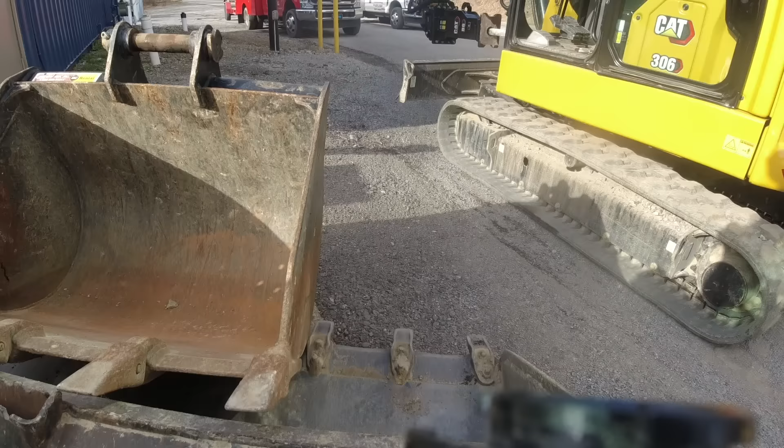Okay, one last clip, all covered up. I have 2 layers of plastic all weighted down. I don't want wind blowing underneath there. I just used all the debris that I had laying here, weighted that down, as well as this.

Day 2.5, actually day 3 - first day got moved in, broke up a little bit. Yesterday we got a lot done. I wanted to get here before everybody. I'm just going over all my paperwork. There's little details on here. I just want to make sure I don't miss anything.

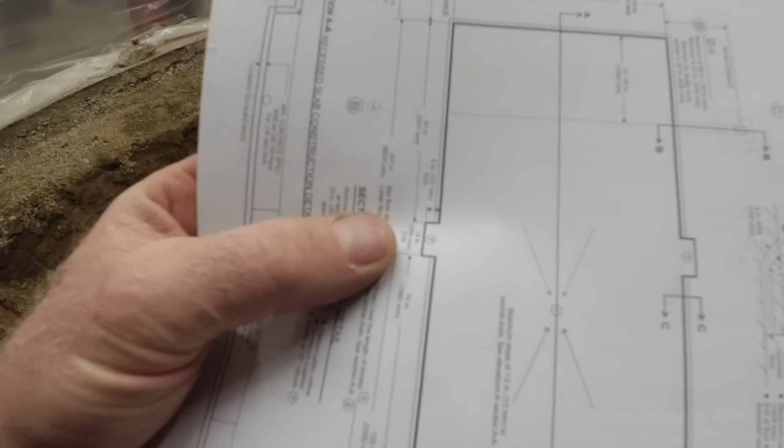Like these 4 pockets that go around the perimeter for the unit to sit in, as well as this conduit for the control panel. So just getting all the positioning set up.

We have our floor drain that's fixed. We know where that is, as well as our height elevation. This says 12.25 inches down from the surface, 12.25 to 12.75 down.

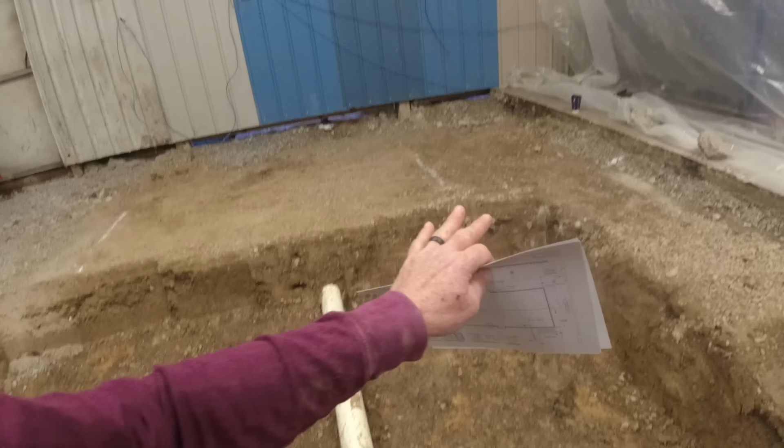Talk to them - they want 13 inches. They'd rather have a little wiggle room to shim it up than be too high and have to deal with it then. So no problem, we'll make this 13 inches down from the surface all the way around.

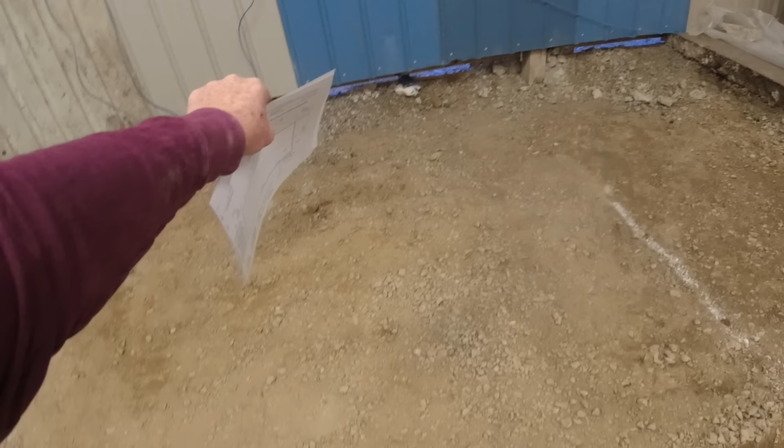This needs to go down a little bit. It's close, but just a little bit too high. So I'm going to dig right beside the pipe and follow it back. If it goes down, maybe we can tap onto it here and run minimal slope to it. But we'll get that opened up and take a look.

Okay, so the pipe really had a lot of fall on it, so that is low enough. Minimal climb, we're going to be good to use the old pipe. And it's nice and cleaned out.

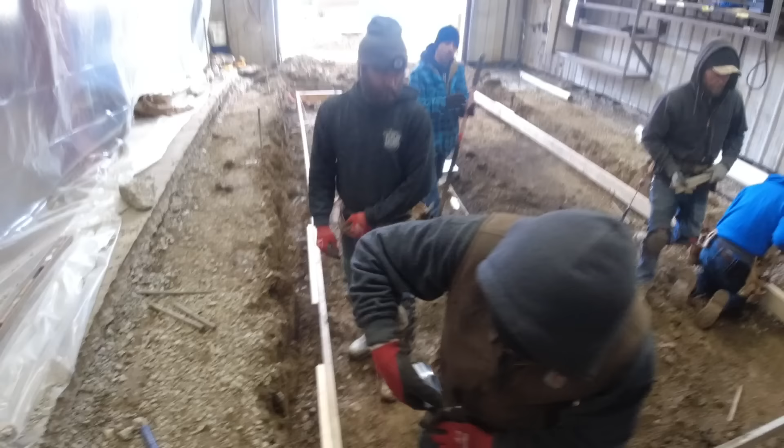Okay, forms are coming together good. Laser is 4 inches up plus 13 down - 17 inches is what we're looking for to the top of our lumber.

Good, Steve? Now we're just stringing it. We're pouring the inside today.

And this is a foot big - everything is a foot big, so our top wall will sit on top of this. So if there's a slight bow in that, not a big deal.

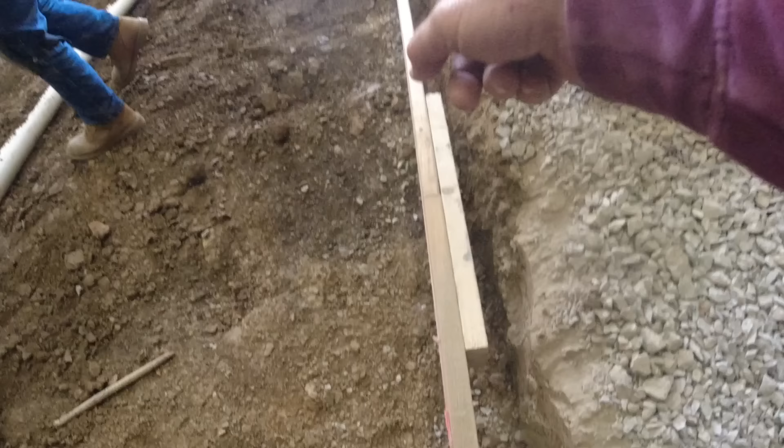So we put a nail, hook a string on it, keep the form about a 1/16 of an inch away from the string.

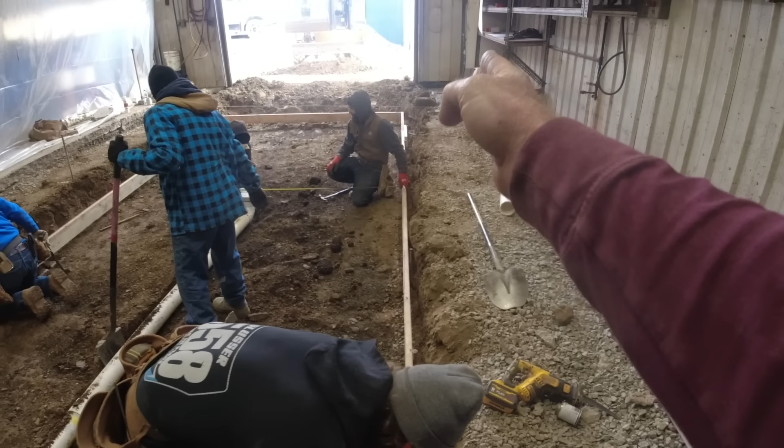We readjusted our box to center on the door, so we have to adjust our drain a little bit - just had to come over about 3 inches.

Taking care of that. I am calling for concrete in about 10 minutes. I know.

Okay, working out pretty good. Took me a little bit longer to true this up. I had to keep shaving just a little bit here, a little bit there, and it just took me a little bit to get it where that box fit in there real nice.

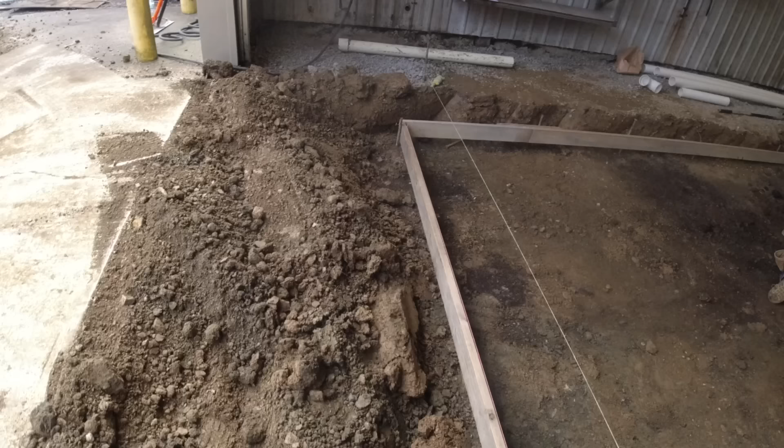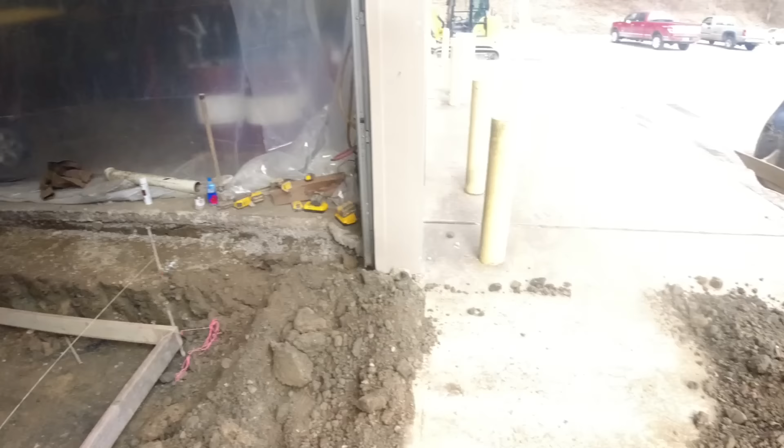Okay, so we might line 2-3 wheelbarrows right up here. I can bring some stone and just run it right in with the skid loader, dump it in the barrows, run it up.

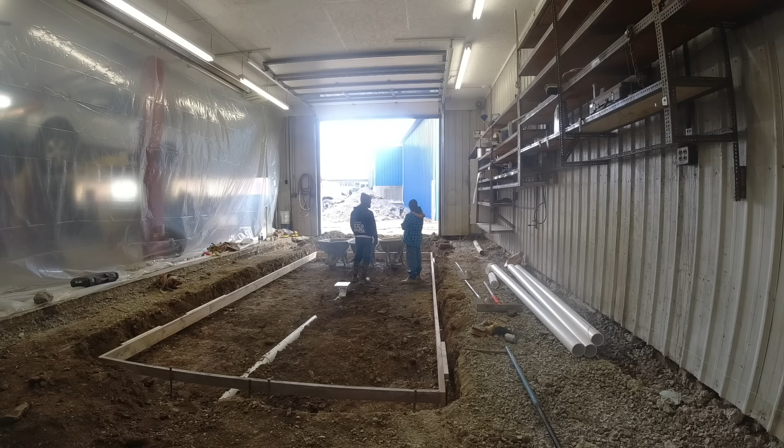Okay, I just ordered concrete, it's coming. So we have about, I'd say a good hour. Hold up, watch your mirror.

Get this all dumped back here out of the way.

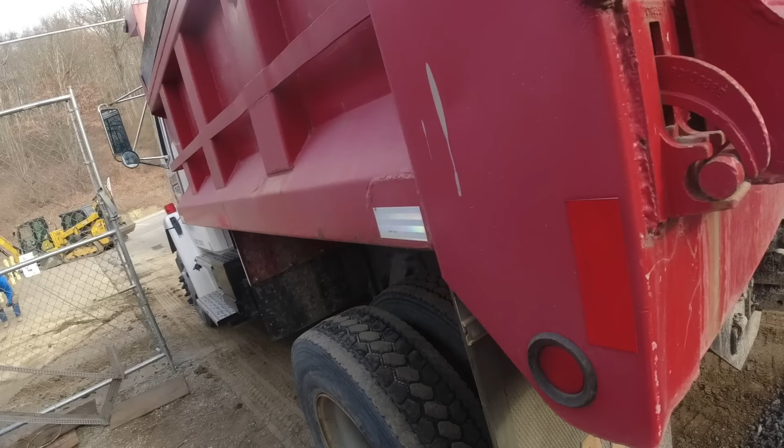Okay. Good, good, good. I love it when a plan comes together. It is cold out here. Save somebody's windshield on the road. Okay, let's go.

Okay, that's how easy it is. Drain is set at a 1/2 inch below our perimeter height.

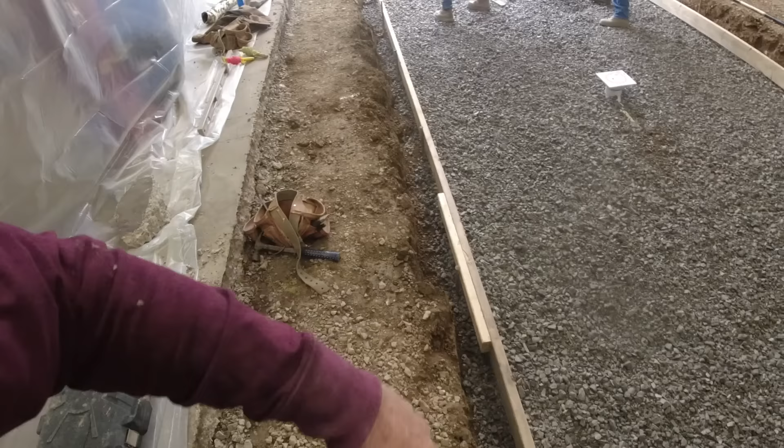Whew, it's noisy in here. 2x6, 2x6, 2x6 - we just graded underneath the 2x4. That's the lumber we had, so we used it.

We got 6 yards coming right now. Get our rebar in.

Now notice we did only put down probably 2 inches of limestone here, all solid. I'm gonna forgo on the tamping - this stuff locks in pretty good.

Like it? Okay, all right, throw some rebar in.

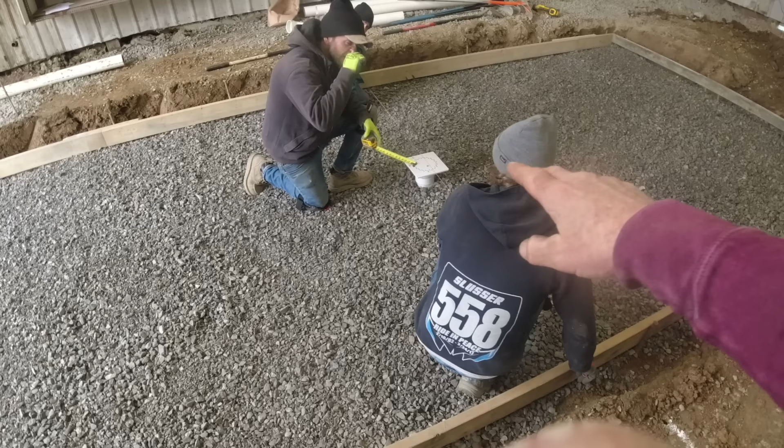Okay, so just checking a drain - 1 inch low. Yeah, it could come up a little bit. It calls for a 1/2 inch of slope.

Okay, time we go down to that, that's 6. And let's get a height right here as far as grade goes - 7.

Okay, all right, we're all pretty close - one 7, rest of it's 6. And the drain got a, you're gonna turn that on a 45 as well? Yeah. Okay, all right, here we go.

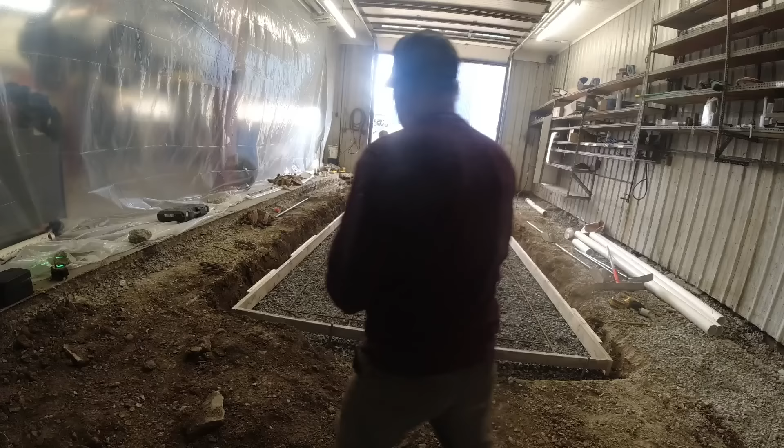Okay, there's our rebar grid, 2 foot by 2 foot. Up on chairs - about every other intersection is up on a chair. But we try and tie every intersection.

These things are a must when it comes to tying. You know, one guy tied this up - what did it take you, Jim? 2 minutes? Yeah, something like that. They're pricey, but worth it.

Okay, let me see the name on that - TwinTier. People are going to ask. There you go, those are the good ones.

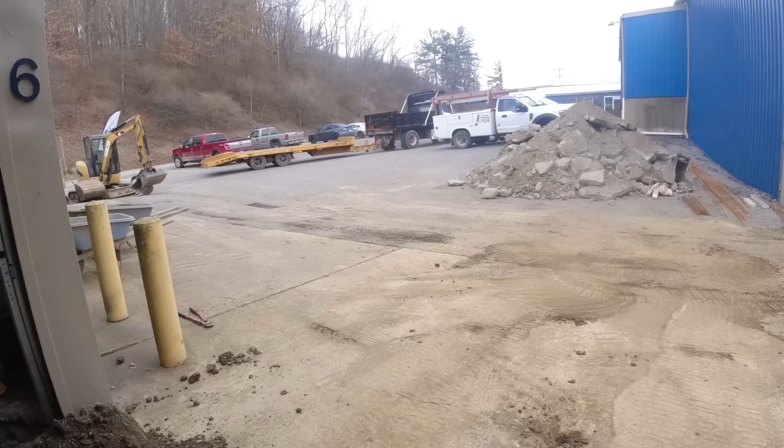Okay, here's my truck. Let's get the 6 loaded and get ready to get out of here.

This is where I keep the hammer.

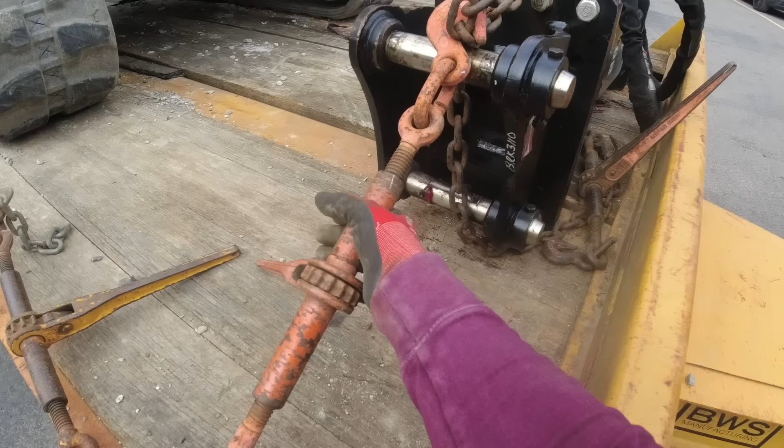4 tie-downs, give them a kick, make sure they're tight. Corner, corner, corner, corner, and then a 5th one through the boom and bucket. Everything's secure, we'll get this home.

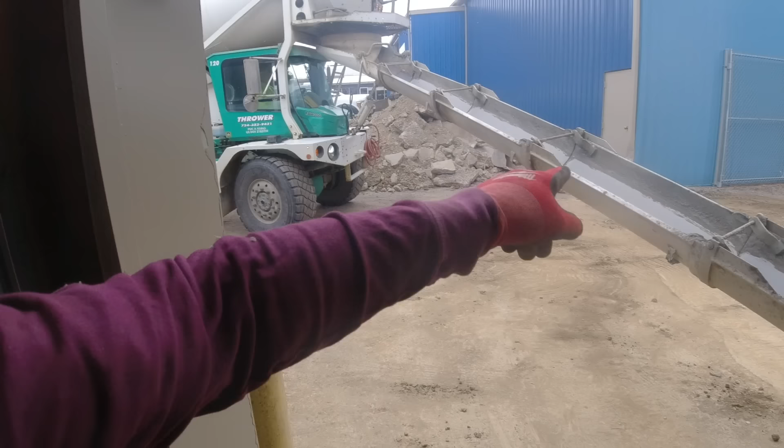Okay, mixer's here. 6 yards, 4,000 limestone mix. All of his chutes on it, gives us 22 feet of reach. We're gonna pull his front tire up here, watching the headroom. Hopefully we can get almost to the back.

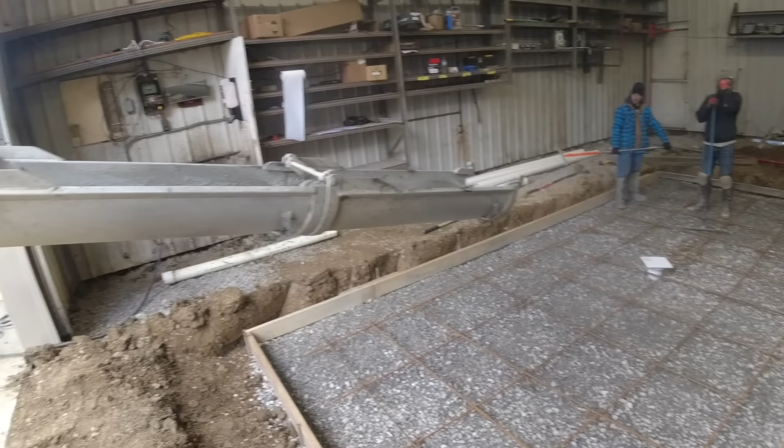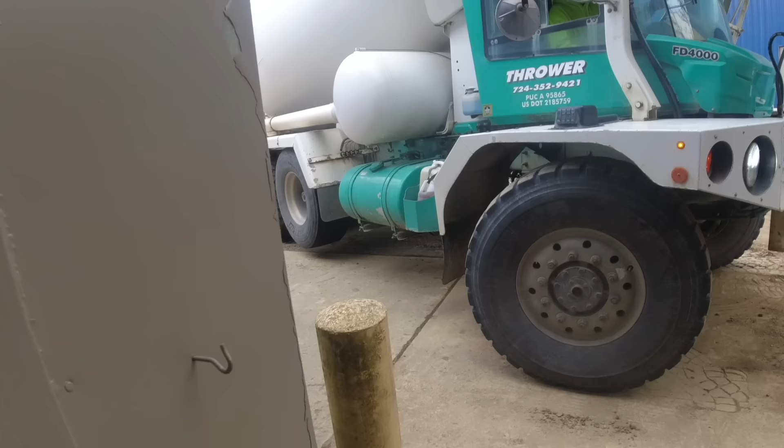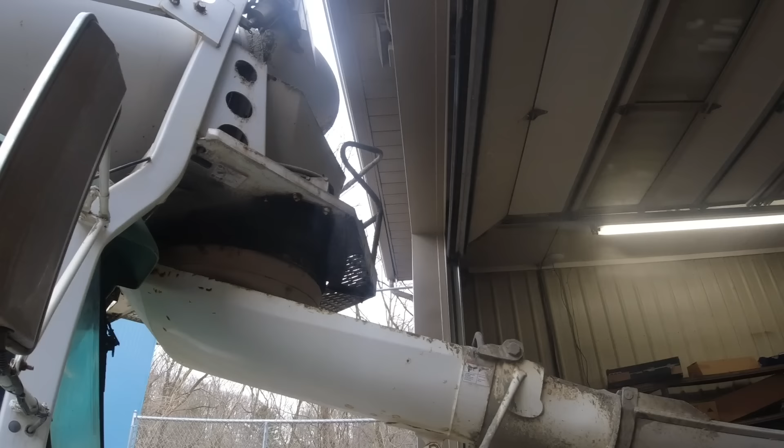One little backup. Three feet. And good. That's it, guys. It can give you a little bit more. You want it? Tiny bit. Good. And if you were underneath that, we could get another foot. Okay.

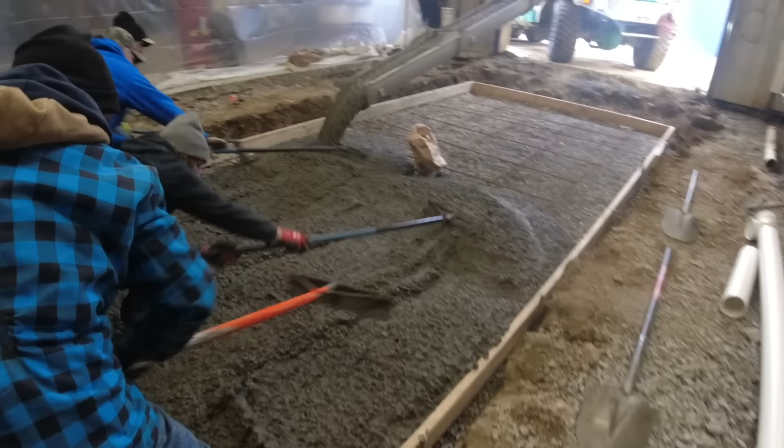Okay, rods are all up on chairs. You can see how it goes right around them. Guys are just working it to the back wall. I'll put the camera down and help out.

It's like 2 minutes of crazy raking and then we're good. And when we say we're good, I mean them.

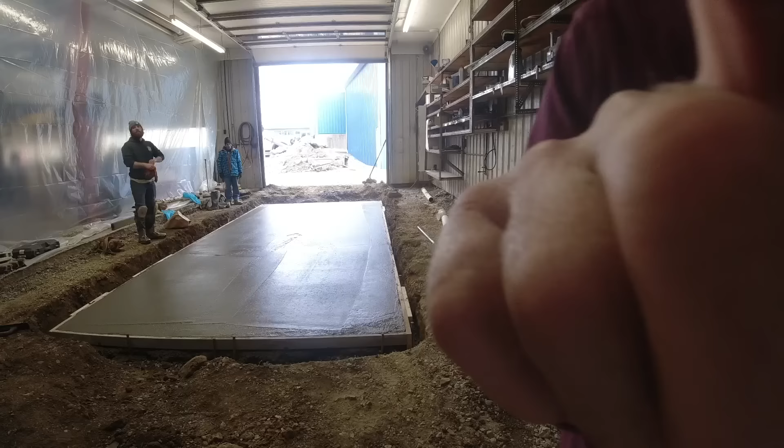Okay, mixer's out there cleaning up in our junk pile. I had plenty of concrete. This went great. I am going to take off, I got some running around to do. I need to find my tool belt, I left it somewhere, one of the job sites. So I got to go see if I can find that.

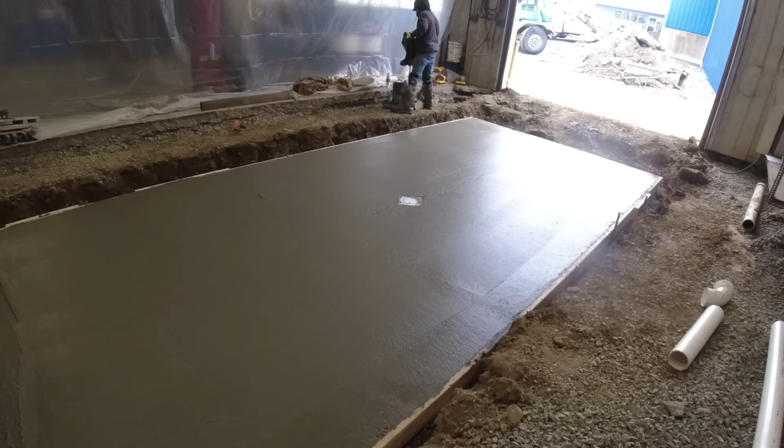And I'll set the camera up. You guys can talk if they want to. We're just going to put a smooth finish on this, and we'll pick it up tomorrow, forming our walls and getting the deck ready.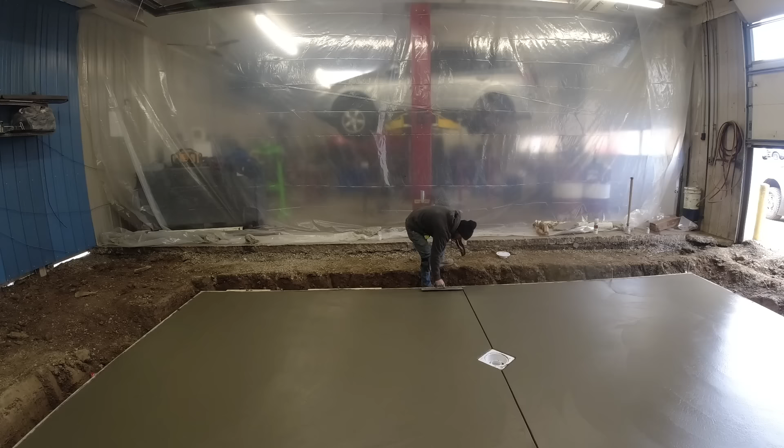Hey, good morning, back at this project. This slab is all nice and hard now. Now we're going to come in a foot from the edge and we're going to build a wall 13 inches high. So we'll get that layout done.

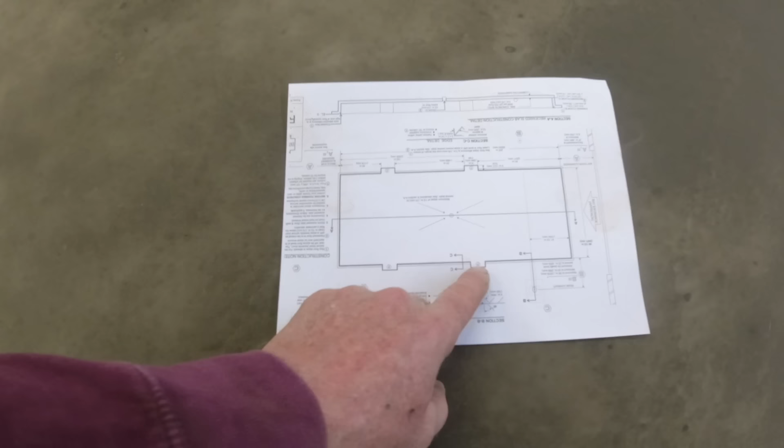We have a drawing right over here with all of our detail work on it. Bay entrance approach right here. So this is what the box looks like. We have to do these bump outs. I'm going to do these in styrofoam after we form through and position these exactly where they're supposed to be.

Alright, so we'll get this going. I'll get some lumber in here, get these outer forms off. The guys will be here shortly. Okay, we have a couple of these companies reaching out to us.

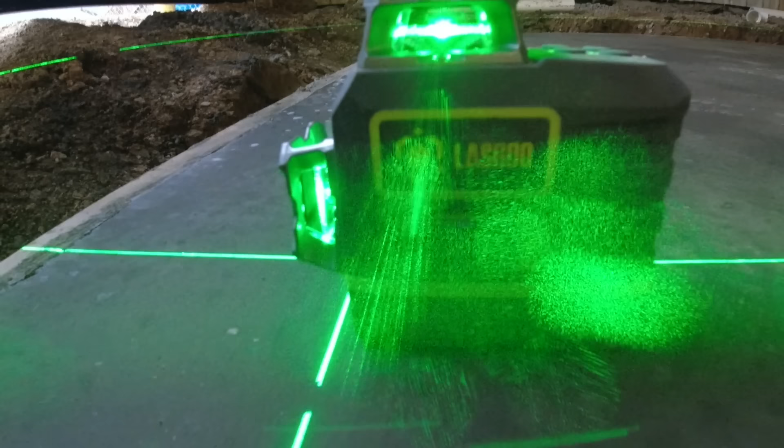Lasgoo Leveling Company sent us this laser last year sometime. We use it quite a bit. So here's a perfect situation where we can use this for layout. Here's a right angle, straight line, so that'll help us do layout. So we'll jump it from corner to corner and get this right on the money.

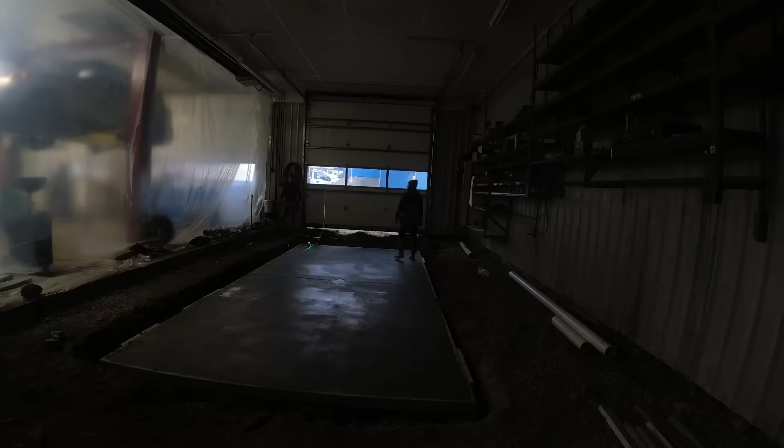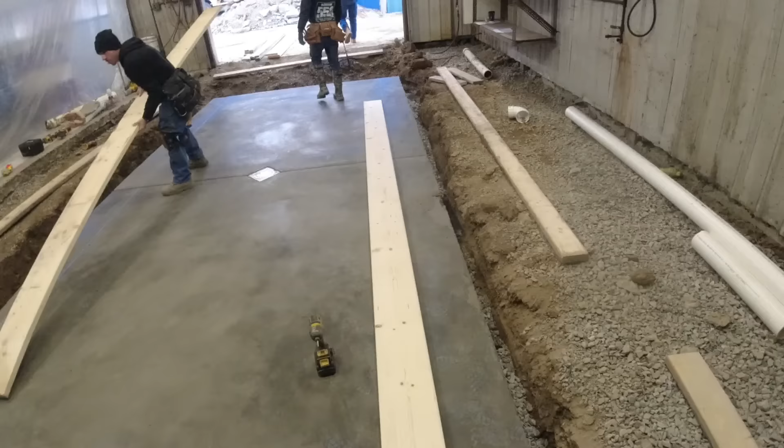So layout is done, we use the laser for that. You can check it real quick, just with a quick square right in there. I mean, that looks perfect. So once we form this up, now we'll do a diagonal and double check that as well. Just safety check after safety check, that's all. Okay, let's get these forms built and talk to you in a minute.

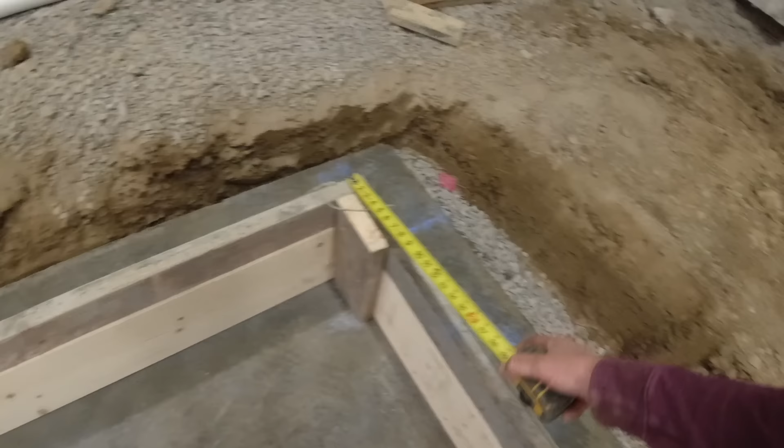Okay, so just getting everything screwed together on our blue line, and I kept shifting it over. I was coming up short. I forgot about the 1/2 inch. I cut these at 93. I should have cut them at 93.5 to add 1.5 inches. 96.5 is what we were looking at. I'm such an idiot. But the good thing is, I caught it before we poured the concrete, right?

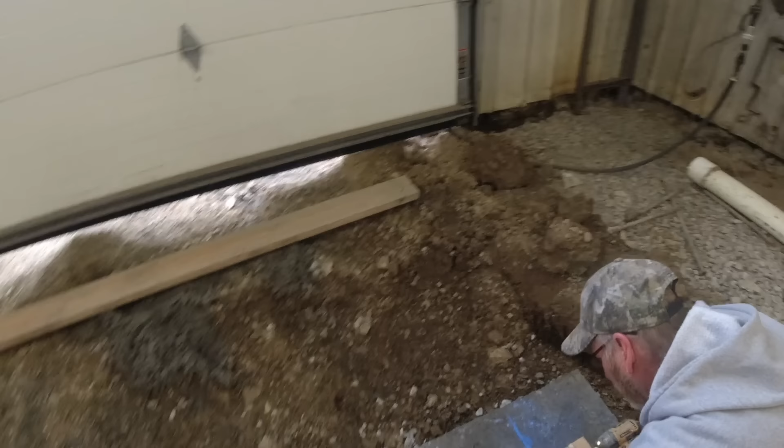That's one way to look at it, Steve. But it happened. Time fixing that, I know. You can't get that time back, you know. All the time I spent ripping a 1/2 inch strip. Jim had to do this twice now. Oh yeah.

Okay, now we'll do some cleats, and we'll put a 2x10 across here. 1, 2, 3, 4 Tapcons down into our brand new concrete. Yikes. We'll just patch those little holes once we're done. Locked into our corners, we put an 8-penny nail on the top edge, slight angle. Now we tie a string all the way around the perimeter. So we're on our blue line, squared and strung. Perfect. We'll get that figured out and pushing forward.

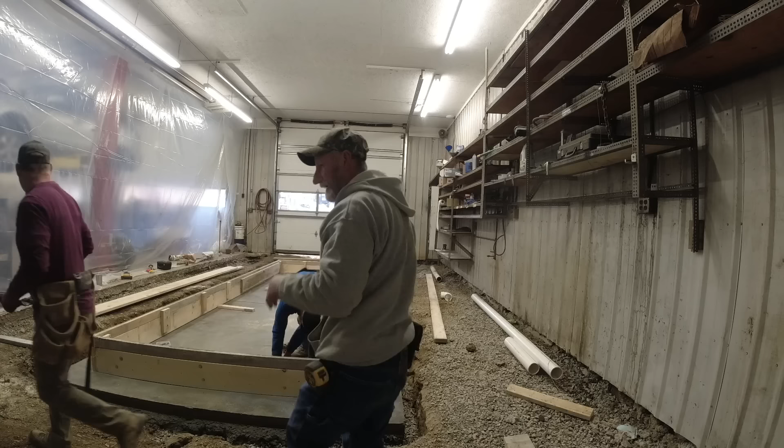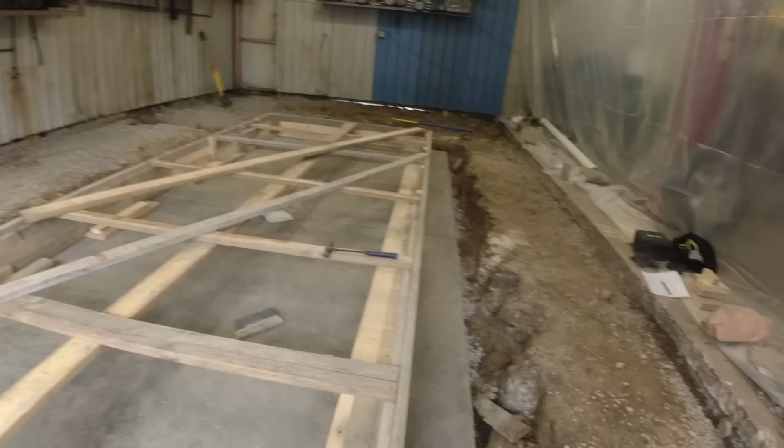There, everything is all screwed and secured. You can see our blue line at the bottom. We did several diagonals on the top, that's what this angled bracing is for. That's holding everything square, Jim on the corner. And I like using the same tape measure from diagonal to diagonal. We use Stanley's with DeWalts.

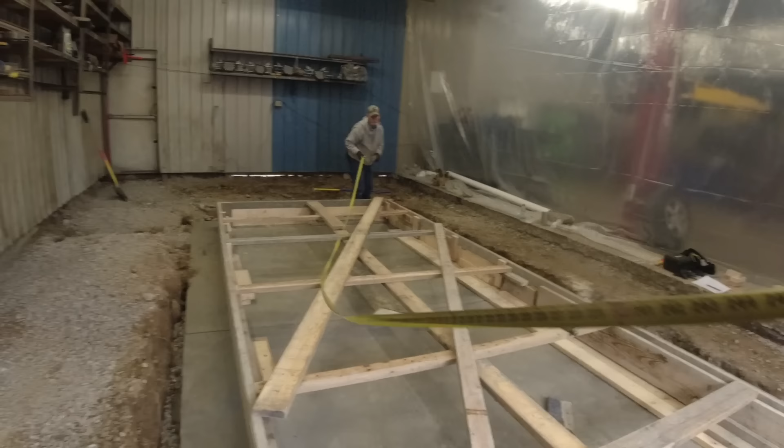Out this far, you check it. It is a 1/4 inch difference. So 255 3/4 heavy. Other corner, 250... 256 1/8. So we're about a 1/4 inch out, that's 1/8 of an inch overall. I'm liking that. It's not perfect, but man, that's pretty darn close. 1/8 of an inch on a diagonal. I think we can all call that pretty square, pretty rectangle.

Okay, stone just showed up. Just look, this is what I do, I stand back and look at it. Where can it push? We have this all Tapcon down and cleated together. Our cross member every 3 to 4 feet across the top, so nothing can push in. End to end, 2 diagonals, I think we're good. Let's get some stone going and get ready for concrete.

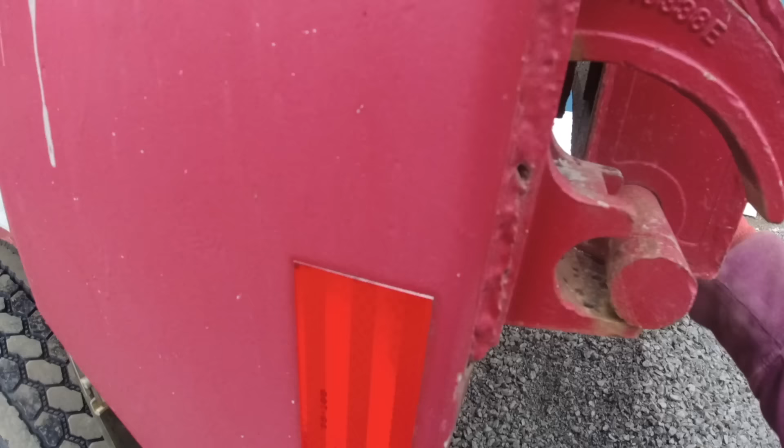Okay, I got another full load. We're going to dump about half of it. I have this, I have that. Good, okay. What's in there? A little bit of frozen. Go ahead. There we go. All right.

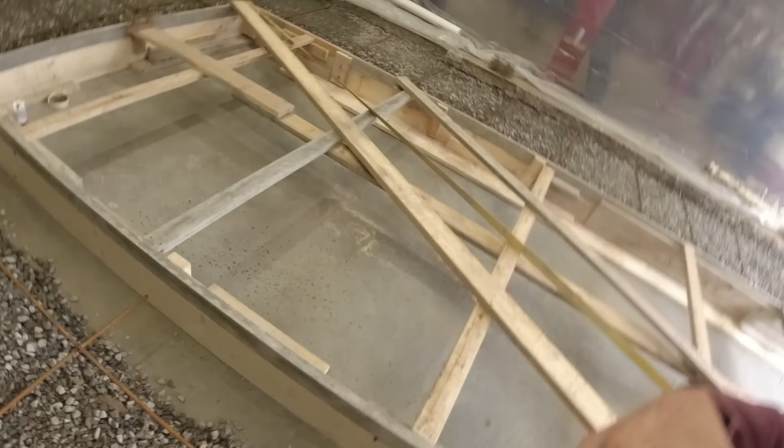Bothering me a little bit, so I got a ratchet strap and hooked it on that corner to that corner. That was our big corner. So we got that, Steve? Yep.

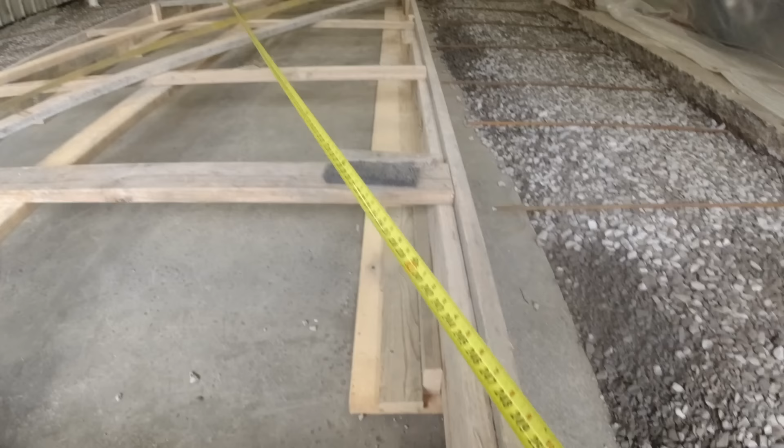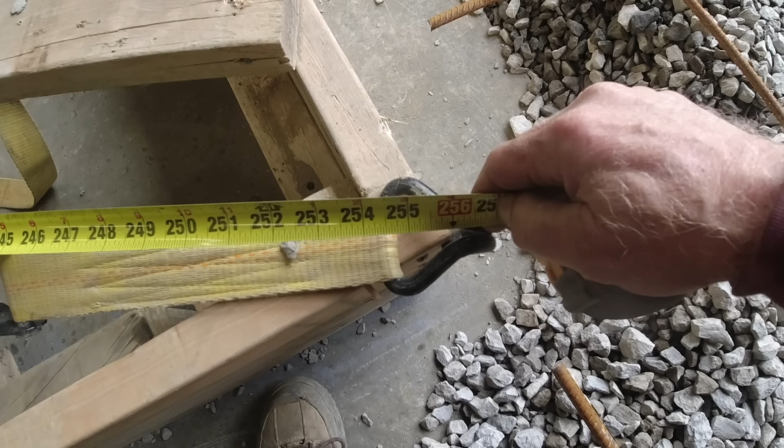How's the old saying go? If it's almost right, it's wrong, right? If it's close, it's wrong. So 55 7/8, 255 7/8. Little bit of a guess going on here with this strap. 256, 1/16 of an inch. Okay, it's not right. We're good, we're good, I know. If it's close, it's wrong.

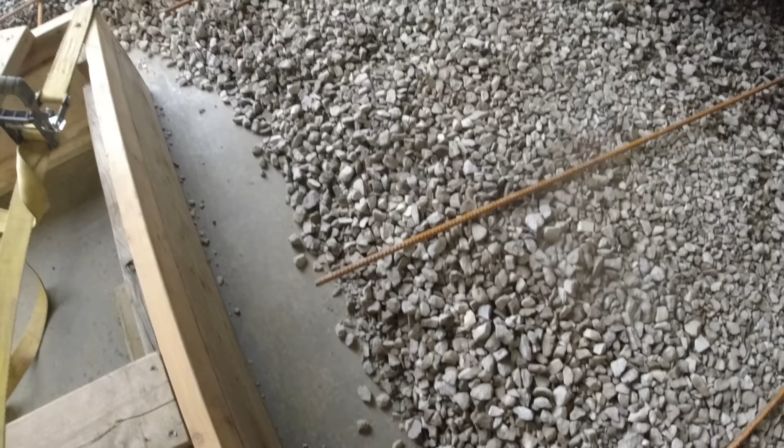I just wanted to show you that we messed with it just 10 minutes and we got it. Come on, stupid DeWalt. Whoa, whoa. I just kicked all the rods crooked. So tomorrow we have to put a couple 20-footers in here and get it all tied up.

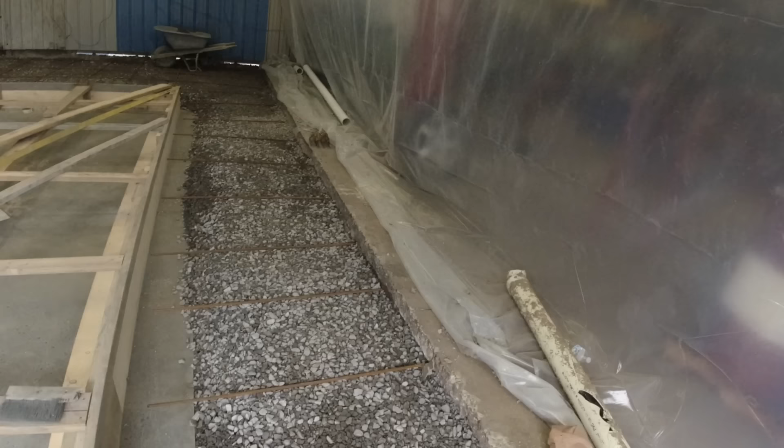That is our grid. 13 up, we're perfectly square, we're plumb. We put our, you're good, thanks Steve. We put our pedestal in over here for the control tower,

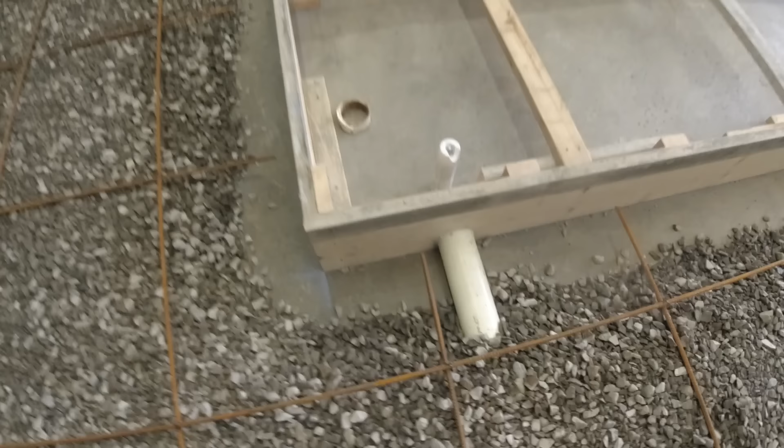for working the hoist right here through, and I just ran a bead of caulking around that pipe. So when we take that form away, now we see a real nice smooth transition from pipe to concrete.

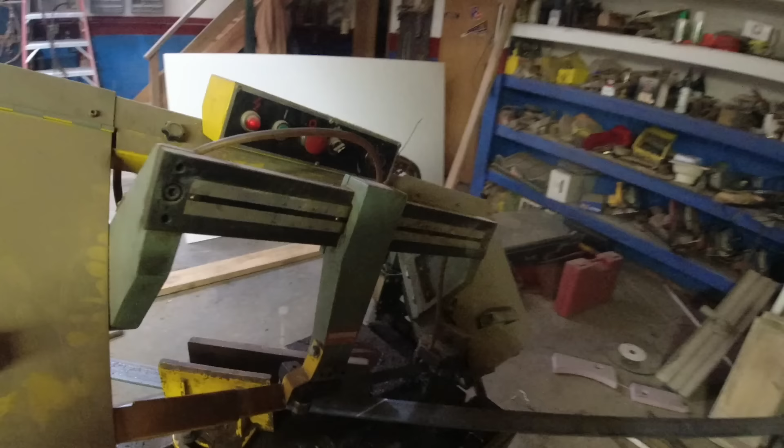So I'll go home and get my angle irons all cut and ready to go. Okay, so I got my 2-inch angle. I'm starting to do my layout, getting all my angles cut. I was going to use a Sawzall to do them, but this is working pretty good. I turned my guides on my saw to a 45, just marking everything.

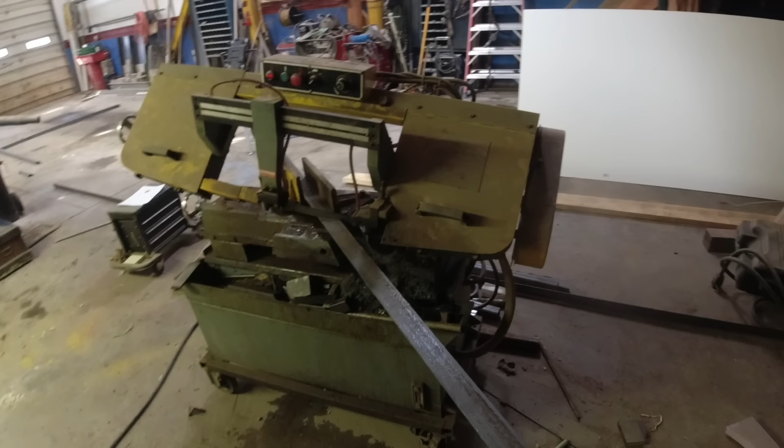Make contact. Go ahead and turn it up a little bit and let it drop right in. How about that? Do I really have, is this how I have to work? How much can I fit in my little shop here? Plus I have it all ripped apart. We're putting metal up on the roof and that's not in yet.

Okay, so my outside corners. So this is right here, this far end. So this is exactly the same as that one. Now I have to connect and do little bump outs. I started making this 5 inches, 44 inches. I'm just marking them all as I go.

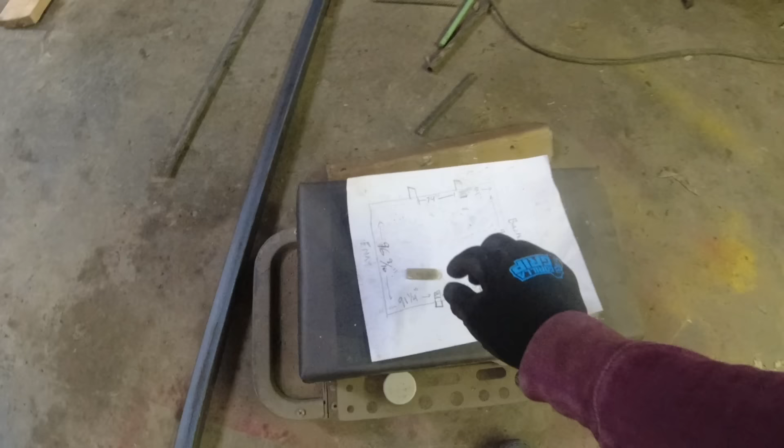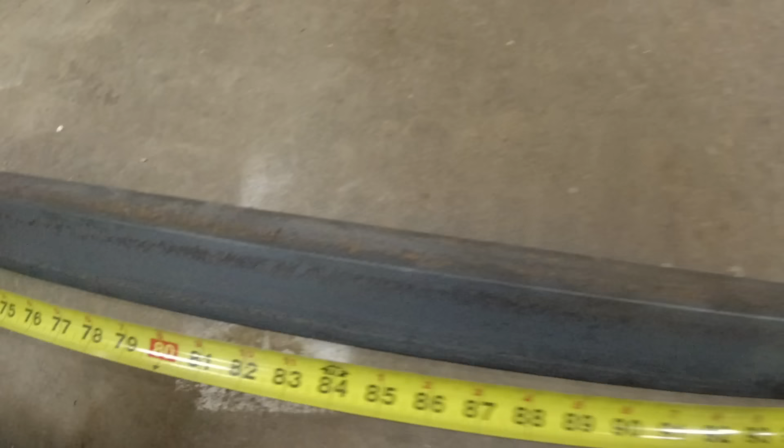Here's my drawing, 96 9/16. From inside, all the measurements are inside. Sorry about the camera. So that should be even with the other side. Good, that's what I'm looking for right there.

Okay, I got a lot to do. I'll put you on time lapse. You can watch me cut and make mistakes. I cut a 14 the wrong way. Redo that.

My last piece, it goes right here. So these get 45 together. That's good, that's good. Okay, good. Everything's cut. Not done yet.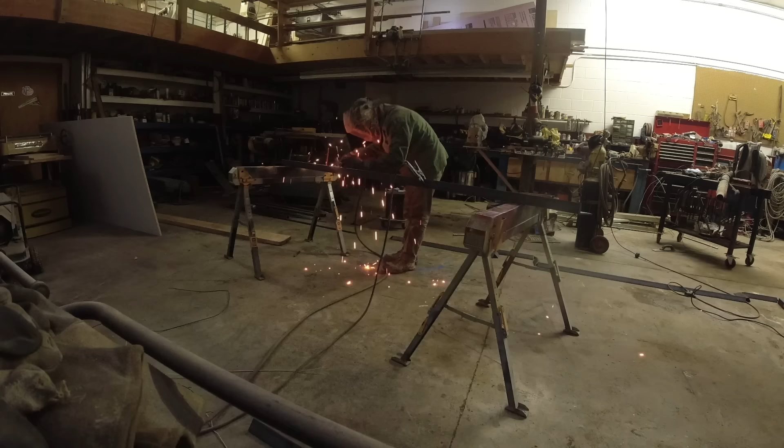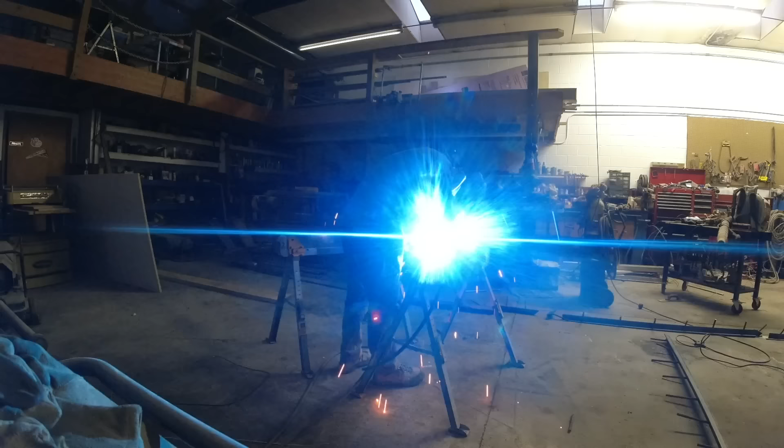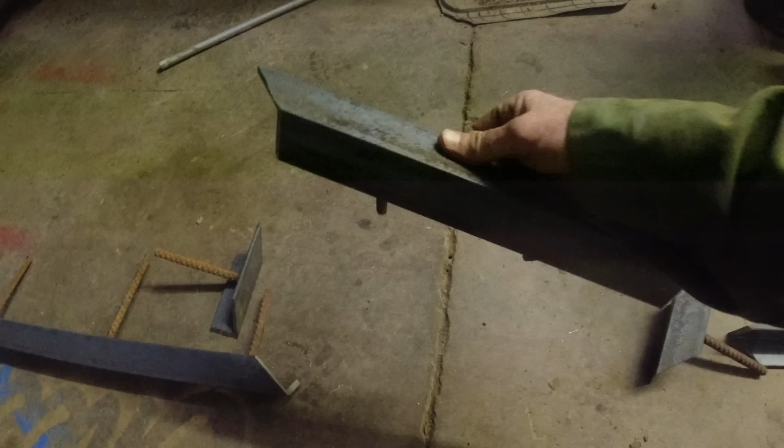Halfway done. Welding the rebar to the back side. I got one side done, that end. Now I just have to do this side and that end. I'll talk real quick. So this goes against the edge in the concrete. The rebar holds these plates, holds these angles in place in the concrete, that way they don't pop off in a year. So I'll get these welded on and painted, primed, and hopefully painted yellow tonight for tomorrow morning.

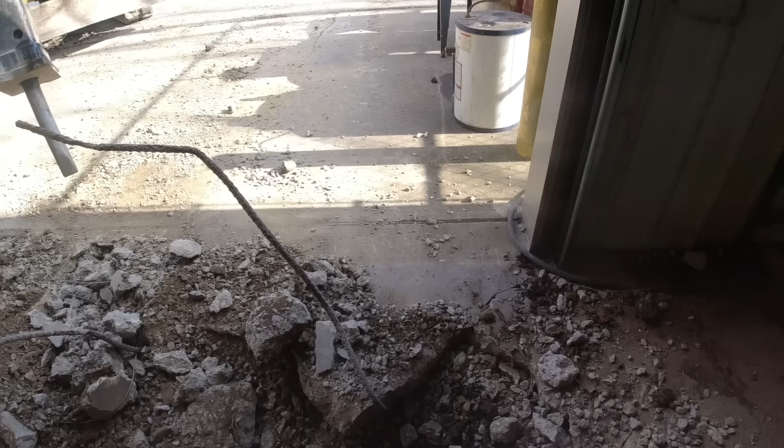Okay, we're down to our last foot, a little bit in the corners. Worried these rebar go into the outside concrete, so we're just relieving that real good. I could get a chop saw and catch that. Let's just hammer it a little bit and see what we come up with.

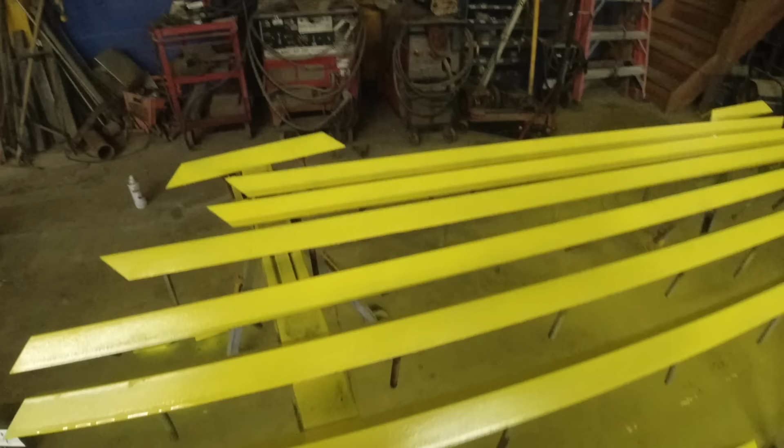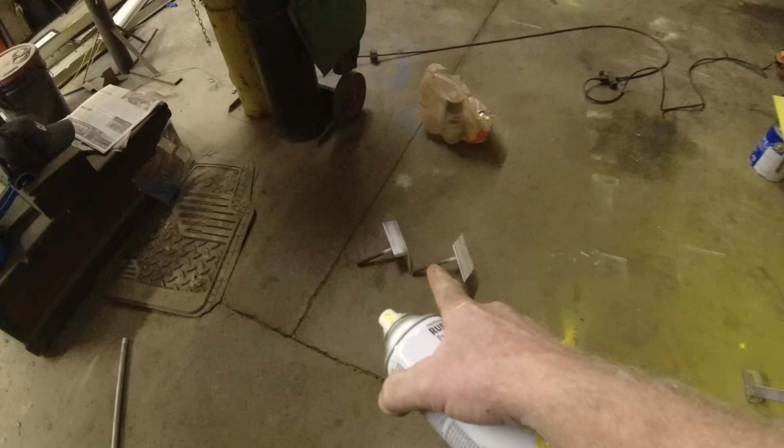Okay, I had to get the camera charged. I ran down and ate some dinner. Came back up, I got a coat of primer on everything, and now I'm just hitting a couple coats of the yellow paint. They picked yellow to go around the edge just as a warning to highlight that edge where the lift is going. So it takes about 3 coats with this spray can.

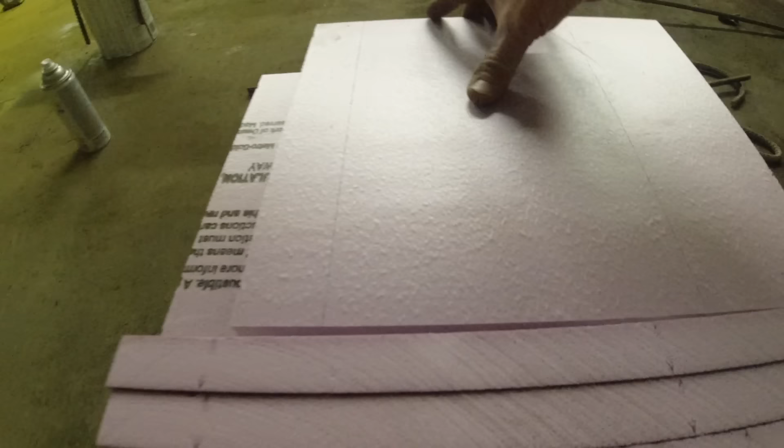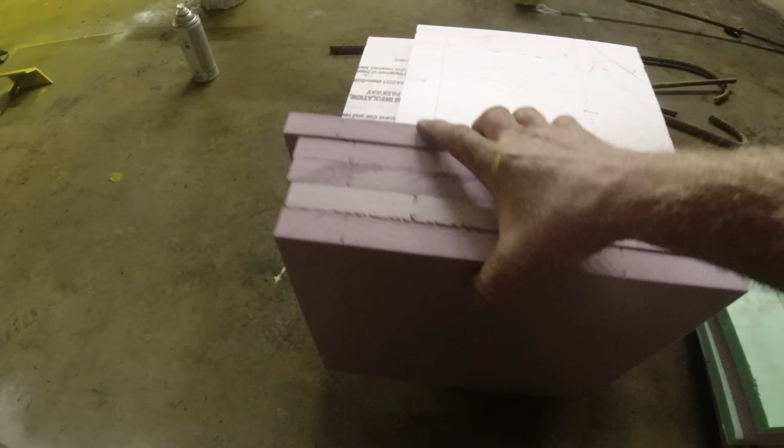So while this dries a little bit, I was just up in the wood shop and I made these styrofoam inserts. Now, on that paper, I'm not sure where it is, and I don't really feel like looking for it. There are 4 little returns, 5 inches wide by 14 inches, 13 inches tall. So I cut them out of styrofoam and we'll put them in that way. That way it'll strip out real easy. If we do it in wood, then they're really hard to get out.

So last little bit of painting and I can shut this down and call it a night. Almost 8 o'clock, so we will be ready for tomorrow morning. I'll see you then. Don't be late.